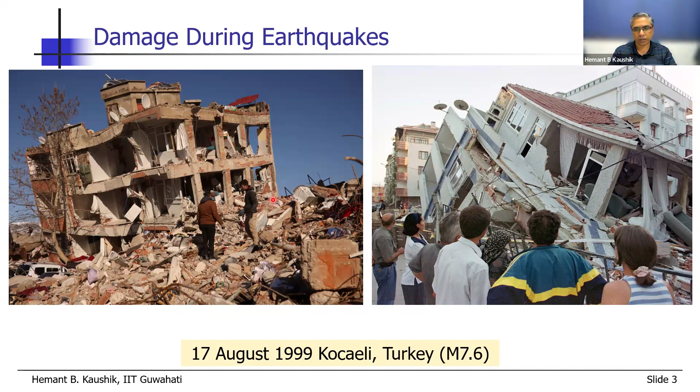So when a building collapses, an investigation happens where different people come together. They try to assess the damage and the reasons why it collapsed. Most of the time, there's not a single reason such huge structures collapse—there are multiple combinations of reasons. I'm not sure what the exact reason was for this failure, but you can see how the entire building got separated. You can see the reinforcement bars, shear walls, and columns completely separated from the foundation.

Then our own Bhuj earthquake of 2001. This was an eye-opener for India, because until that time very few major earthquakes had occurred in urban areas. But this earthquake, which occurred quite far from Ahmedabad, resulted in a large number of buildings in Ahmedabad collapsing. Most of these buildings which collapsed were residential apartment buildings with open ground story.

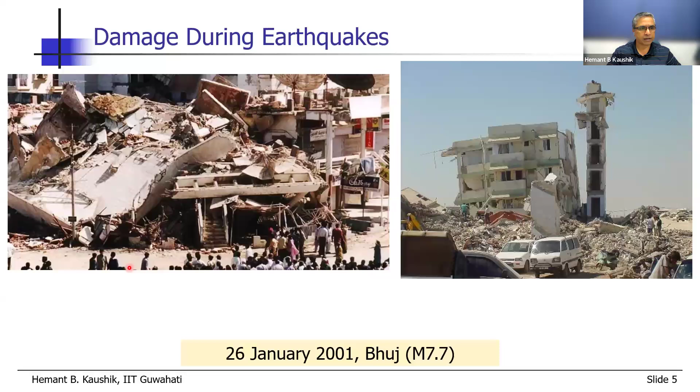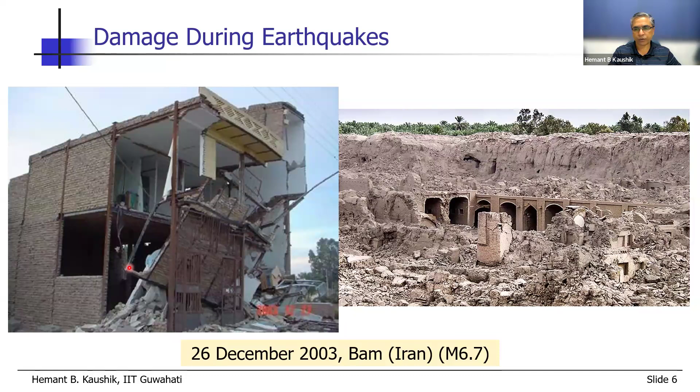Then I'll move to a different type of building here. These are not reinforced concrete buildings—the collapse of entire cities, towns, and villages happened in Iran in 2003. These are photographs of the town called Bam in Iran. The earthquake was 6.7 magnitude, big, but not as big as the 7.7 or 9 we've just seen. But you can see the damage. These are masonry walls, unreinforced masonry (URM) buildings, which collapsed.

Then again, reinforced concrete structures which were damaged unexpectedly. This is the 2004 Sumatra earthquake in Indonesia, a huge earthquake, 9.3 magnitude. This photograph shows a building in Port Blair. This building is also in Port Blair—a small, two-story building, and you can see what happened to it. There's nothing above this, just a porch. So very small structures, not expected to behave like this.

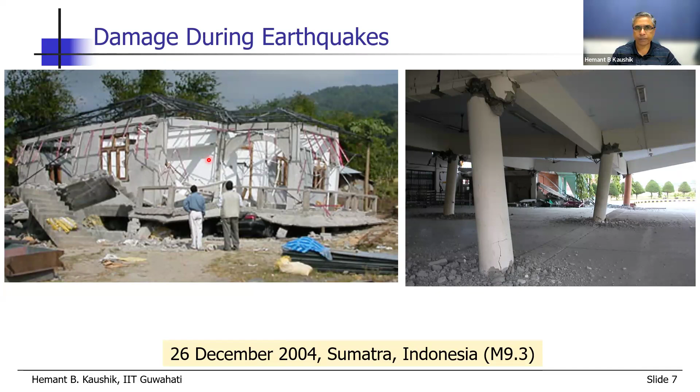This happened during an earthquake that occurred almost 1100 kilometers away. The epicenter of this December 26, 2004 earthquake was about 1100 kilometers from here—that means something happened in New Delhi and damage occurred as far away as Hyderabad. That's what we're talking about; generally this isn't seen. So what resulted in such unexpected behavior? These are the questions we'll try to address today.

Again, the 2005 Kashmir earthquake—you can see a very different combination of buildings that suffered huge damage. On the left side, this figure shows complete destruction of unreinforced masonry buildings, old buildings, and you can see the type of informal construction here, the type of rubble used in construction. Any type of rubble, any construction technology that may not be suitable for this highly earthquake-prone region was used here.

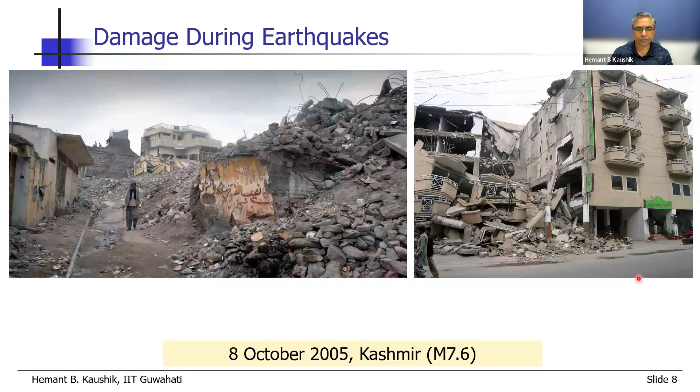Similarly, in the same earthquake, in urban areas, we found huge damage to reinforced concrete structures as well. Here we can see a 4-story building completely crashed, demolished, collapsed after the earthquake. Similar construction technology and typologies are seen in many cities in Pakistan, and similar damages were observed—these are reinforced concrete structures, again 4 or 5-story buildings. These are the buildings we have mostly been seeing suffering damage.

The 2008 China earthquake, again a very big earthquake, 8 magnitude, where we also found huge boulders sliding down the hills, damaging buildings as well as cars and other structures.

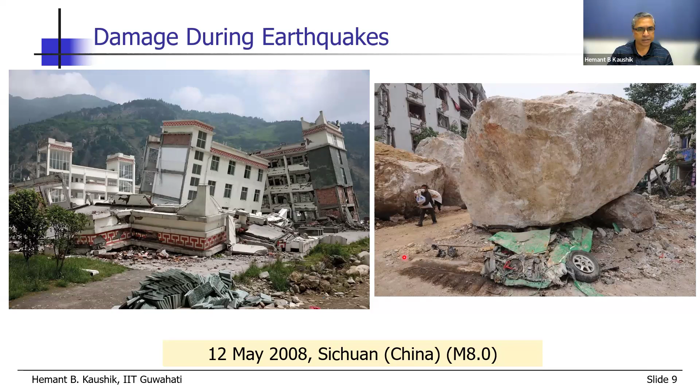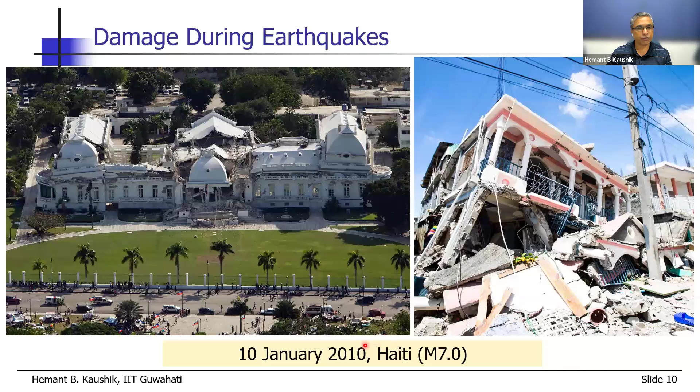2010 Haiti earthquake showed the combination of reinforced concrete buildings and the poor performance of unreinforced masonry buildings. This is the main palace of Haiti, where the president used to live, and you can see complete collapse of this unreinforced masonry palace. No doubt this type of construction was going to collapse in a 7 magnitude earthquake nearby. For those who don't know where Haiti is, look at Google Maps - you'll be surprised to see it's very near to the United States of America.

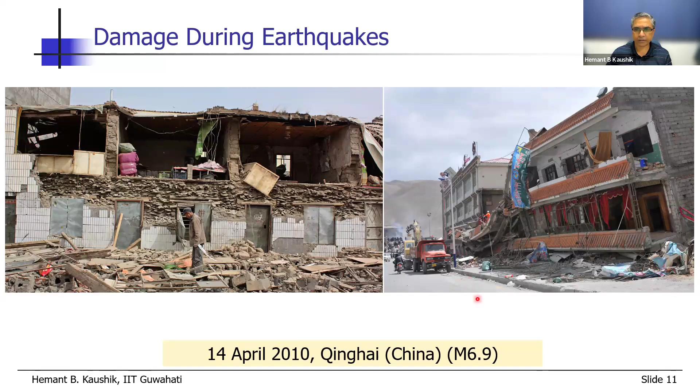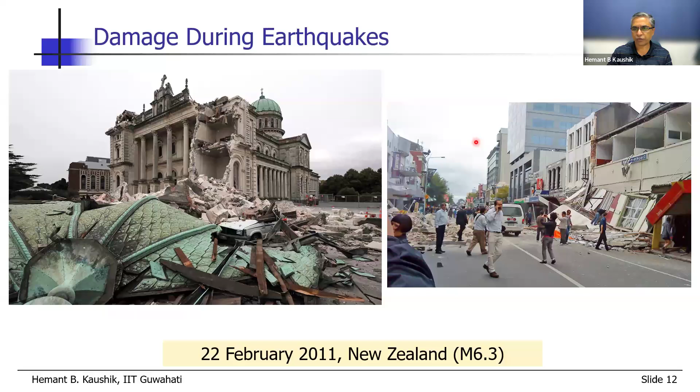Even in developed countries like New Zealand, a small country that spends huge amounts maintaining structures, construction, and design codes, the 2011 earthquake, which was not very large but occurred very near these structures, caused damage. This unreinforced masonry church building partially collapsed, along with some reinforced concrete structures. So not only in developing or underdeveloped countries, but also in developed countries, we see similar types of problems.

In Japan, an earthquake-prone country, the 2011 earthquake, magnitude 9.0, was particularly known for the damage it inflicted on various cities. Here, not only the shaking but also the tsunami waves resulted in huge damages. Most of these buildings were damaged due to tsunami, but some standing buildings show cracks and damage from the direct effect of earthquake shaking.

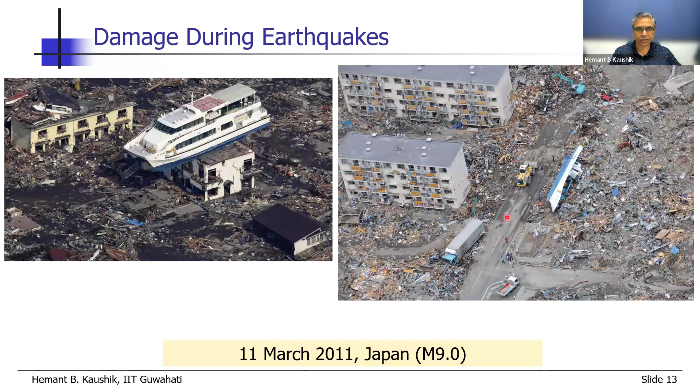2011 Sikkim earthquake, magnitude 6.9, one of the biggest earthquakes this region has experienced in recent times. We found large numbers of reinforced concrete buildings constructed on slopes suffered huge damages. This was actually a 5-story building, and you can see how cascading effects resulted in complete failure, with reinforcement bars visible. It's very obvious why these buildings failed, which we'll discuss later. A similar building looks like 2 stories from this road, but was actually 5 stories viewed from behind - that's how buildings on slopes are constructed. Most of these buildings suffered damage during this earthquake.

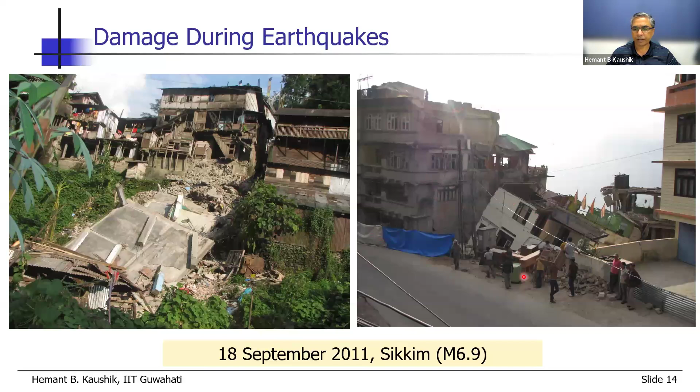Then the Turkey earthquake, 7.2 magnitude in 2011. Large numbers of reinforced concrete buildings again failed. When these buildings fail, the heavy roof collapses onto the floor below, and that entire story collapses onto the next, and so on. It becomes very difficult to get away from these buildings if there isn't enough warning. Tilting, when buildings are constructed on slopes, has been a common feature among all these earthquakes.

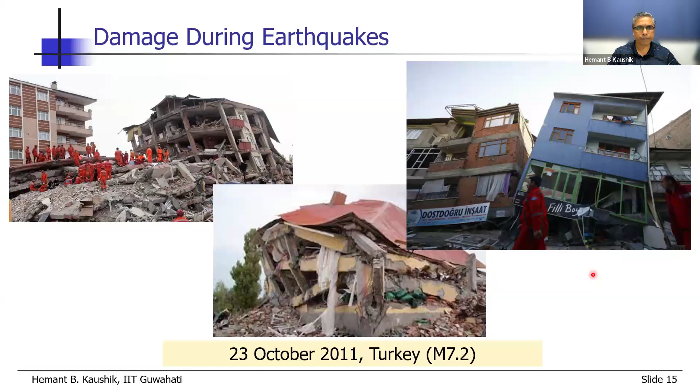2015 Nepal earthquake - you can see reinforced concrete buildings as well as unreinforced masonry buildings. During this earthquake, very old and famous temples in Nepal suffered unrepairable damage. You can see how old these buildings were - some are part of the temple complex, with huge thickness of walls and slabs. But unless the perpendicular walls are connected properly, we are going to see such kinds of failures.

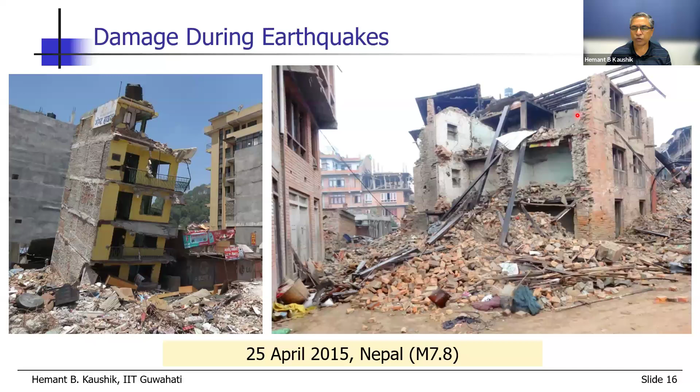2016 Imphal earthquake, another big earthquake, 6.7 magnitude in this region, Imphal, resulted in such failure of reinforced concrete members. This is a very famous women's market in Imphal, Ima Keithel. There are 4 such markets, and out of the 4, 2 or 3 suffered some damages, 2 suffered huge damages. All the columns in this market complex suffered such kind of damage.

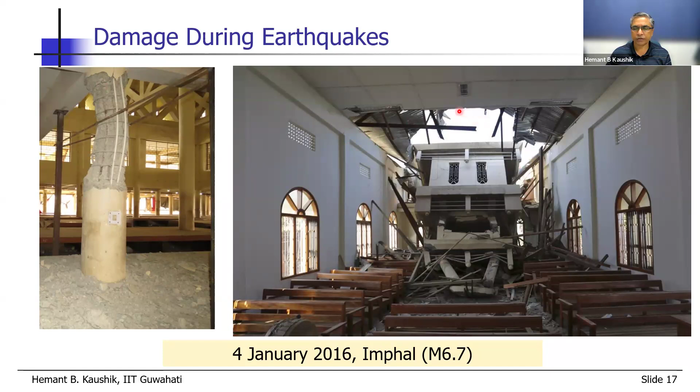Later on, concrete jacketing was done in these columns. This is a church in Imphal, and you can see how a part of the structure has collapsed and penetrated through the roof.

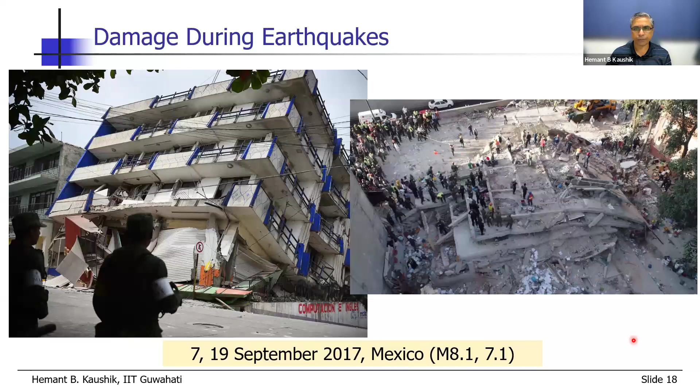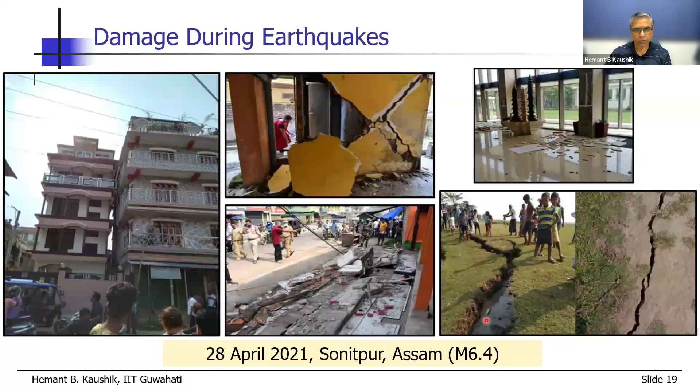So now I think you can see that the places are now being repeated. There were earthquakes in Haiti, there were earthquakes in India, there were earthquakes in Turkey, Iran, all these places, Nepal. These are now being repeated. But the major point here is, though the earthquakes are repeatedly occurring in these regions, the important point is damages are also repeatedly occurring in the regions. We might not have learned any lesson. That's why similar types of damages are occurring again.

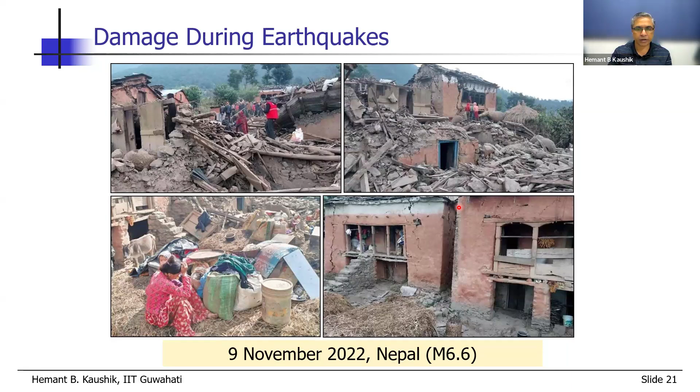This 2022 earthquake was a smaller one compared to the previous one, and you can see how unreinforced masonry buildings have suffered damages.

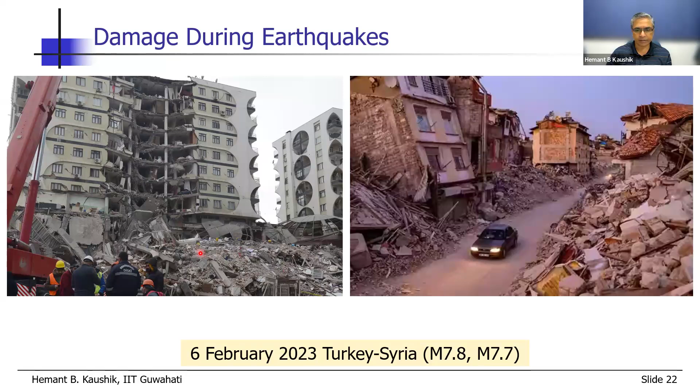Now, looking at these damages - and these are the unreinforced masonry structures - what we realized is that the design was very poor, the detailing was very poor, the connection between different elements was poor, and of course with some luck involved here. Basically the amalgamation of poor engineering, poor material, and a big earthquake nearby resulted in such failure.

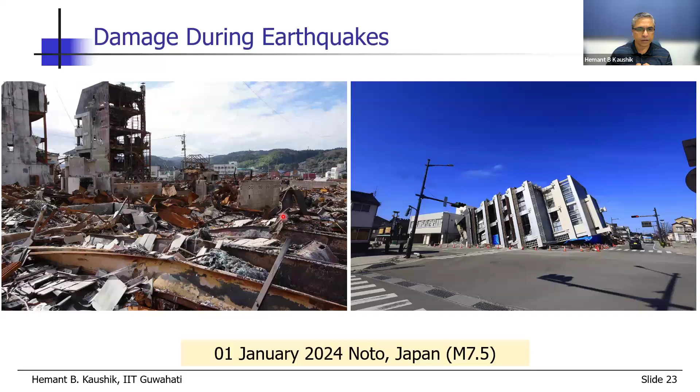2024 Japan earthquake. Again, you can see how liquefaction and foundation failure resulted in such huge collapse of big structures, big buildings. These are again reinforced concrete structures as well as steel structures collapsing.

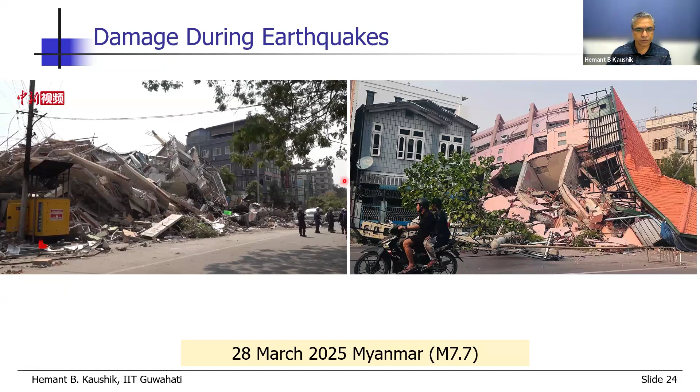Then the recent 2025 Myanmar earthquake, 7.7, and this is the earthquake in which we found a building in Thailand collapsing because of this earthquake in Myanmar. That was really surprising, how a building in Thailand could get that kind of damage. But then the plate tectonics in this region is such that these waves can transfer to long distances. Again, reinforced concrete buildings that collapsed.

So what we have seen is that RC buildings have collapsed. They have suffered huge damages during the past earthquakes in all these countries - developing, underdeveloped, all these countries. Then the second type of building that have suffered huge damages are the unreinforced masonry buildings. These types of buildings, which are vernacular or the traditional building typologies, have not suffered much damage during these earthquakes.

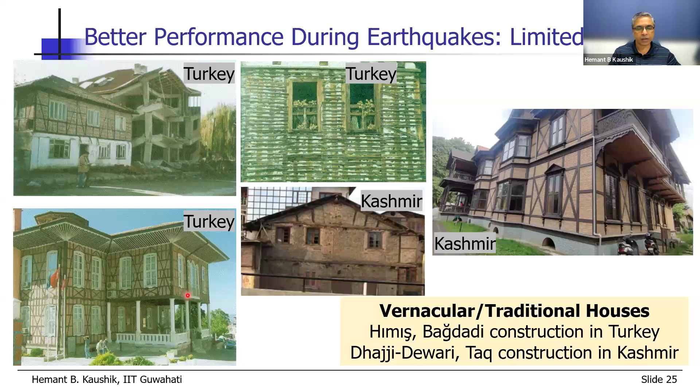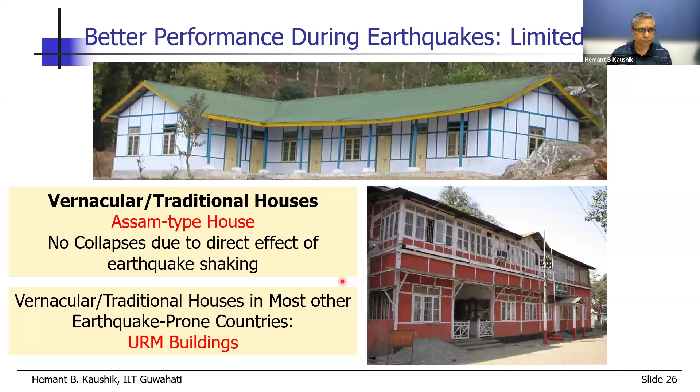So what we have seen is that these vernacular housing systems or traditionally built houses have not suffered significant damage during these earthquakes. But the new construction technologies, the reinforced concrete, have suffered huge damage. Now, what is the reason? That's what we are going to discuss next.

What we have seen is that the most common building material constructed in India is masonry. So masonry is the most common construction material in India. It is used in more than 80% of the building stock in India, so more than 80% of the building stock is unreinforced masonry.

Now why is it so? Because bricks are economical, they are very easily available in various shapes, sizes, and textures. So almost every building has masonry.

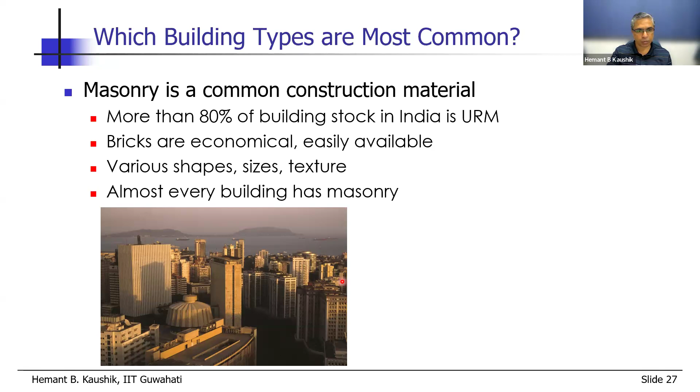You can think of this building in New Bombay, Navi Mumbai, or this building in Gangtok, the capital city of Sikkim. One is a very organized construction, the other is haphazard growth. But all these buildings have masonry in some form or the other.

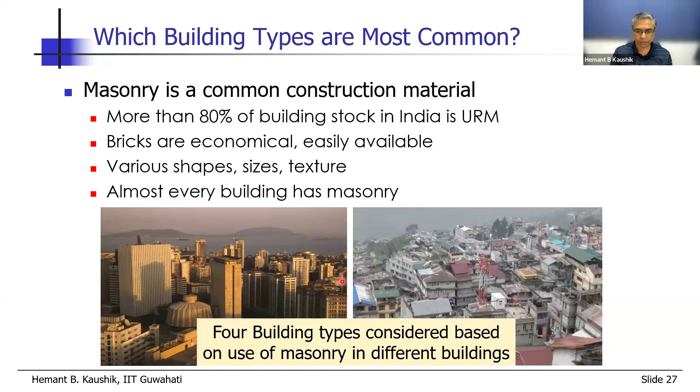Now, use of masonry in these buildings governs how they are going to behave during an earthquake. Based on the usage of masonry in different buildings, we have considered 4 building types, and we try to determine the reasons for their poor or good performance during earthquakes. Now, how did we find out these 4 building typologies?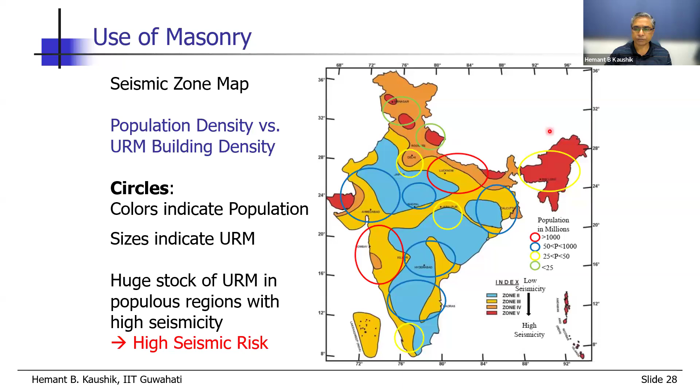Based on this, we came up with an idea to test 4 different types of buildings that are most popularly constructed in India. The first of these is masonry infilled RC frame buildings, because we have seen that these buildings suffer huge damage during earthquakes.

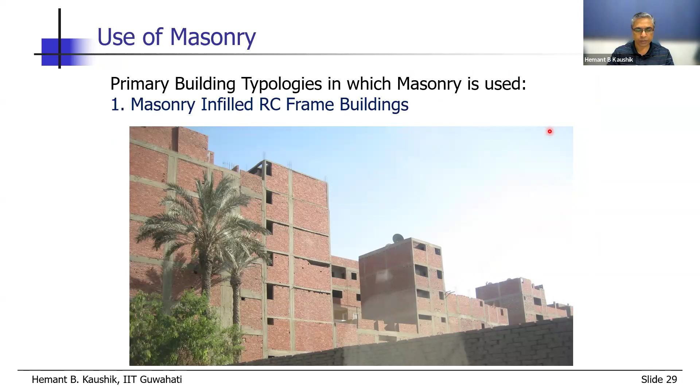Then the next is unreinforced masonry buildings, because we have again seen that these are the buildings which suffer after almost every earthquake. We find that URM buildings suffer the most. So we have considered these.

Now this building visible in this photograph, I'm sure some of you might recognize it. This is a 120 year old unreinforced masonry building, constructed in Port Blair during British time as a cellular jail. This is what they used to call Kalapani.

They used to send our freedom fighters here. This was originally a very vast structure. You can see here the central tower, the watchtower, and there were 7 such wings which emanated from this central watchtower. Today, I think 3 or 4 such wings are still standing, and they attract a large number of tourists. Out of 7, 3 have collapsed completely during the last 120 years, but 3 or 4 are still standing.

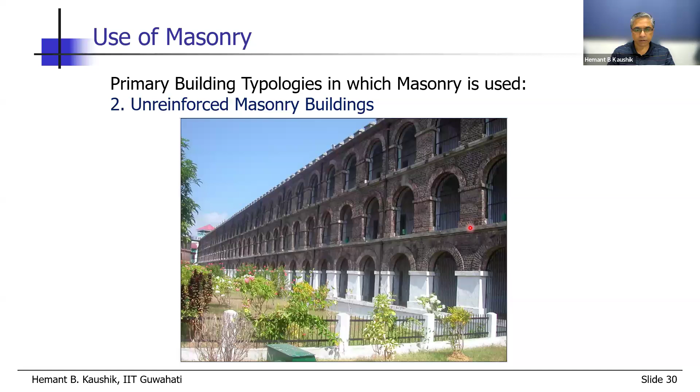So this is a pure, completely unreinforced masonry structure. All these arches, everything, is unreinforced masonry here. But not all buildings have performed so well during past earthquakes, as we have already seen.

So the third type of construction that is there in many countries now is confined masonry buildings. These come somewhere in between reinforced concrete structures and unreinforced masonry structures. A combination of these two gives us a confined masonry building, and I'll discuss more about it later. What is the difference?

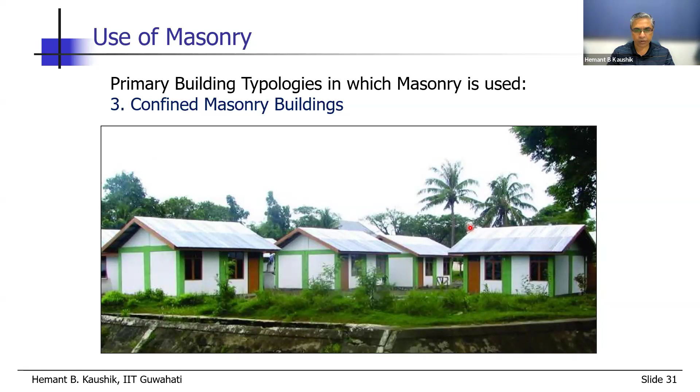Then we have selected the fourth building typology, which is a vernacular, traditional building in this part of the country, in Guwahati, in Assam, in the northeast. In fact, this type of building is very common along the Himalayan belt. So the Assam type houses, also known as Ikra houses, are considered the fourth building type for this study.

Here, the masonry infill walls are used below sill level, up to this level. Below this, these are all unreinforced masonry walls. But above that, there are no masonry walls. We'll discuss more about it when we start discussing the tests.

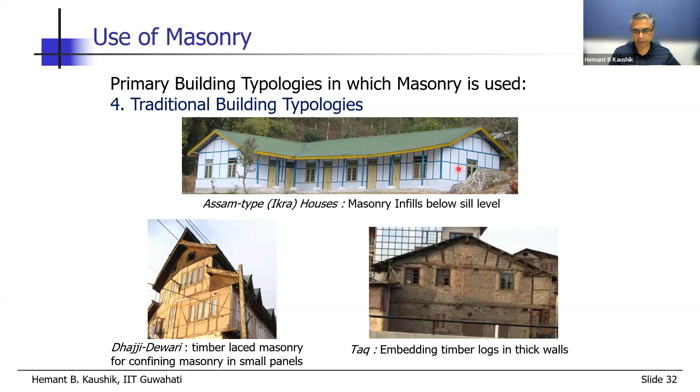So then what we did, this is the first building type, reinforced concrete frame buildings. We tested a large number of such frames without infill, with infill, different types of infills, different strength of infill, different materials - somewhere fly ash bricks, somewhere clay bricks - and all these, whatever possible at that time, we tested. We also considered different areas of openings in these walls. If I remember correctly, we tested more than 25, 30 such frames under earthquake-like lateral displacement applied here at the slab level.

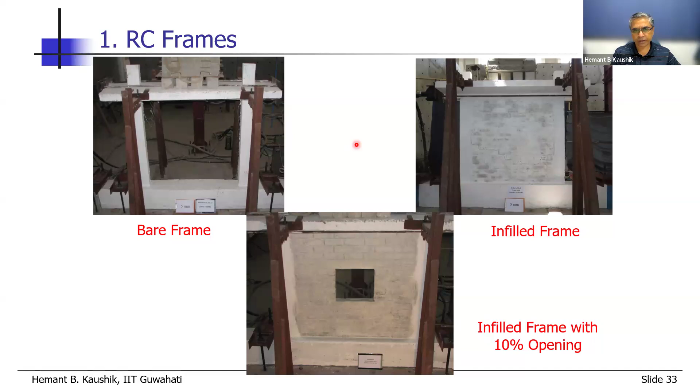And we got very good insights on their behavior. So today I'm going to compare, out of those 25, 30 tests, I'm just showing you results for these 3 tests.

This is how the tests were conducted. The specimen, the frame specimen, was connected to the strong floor rigidly, so it did not move at the base. The displacement loading was applied using the servo-controlled hydraulic actuator at the slab level. The response was recorded with the help of LVDTs, strain gauges, and laser displacement sensors connected at different places.

So you can see the reinforcement detailing, the locations of the strain gauges wherever we have used - all that is visible here.

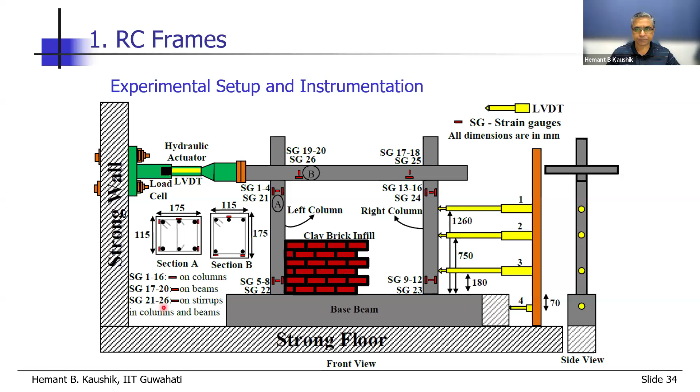What I'm going to show you is the video of one of these tests. The test was carried out in a slow cyclic manner because we wanted to record the damage to different members during this test. Though the test took about 2.5 to 3 hours to complete, I will show you the test in a very fast forward manner - maybe about 30, 40 seconds, we'll see the entire test.

So please try to see how the damage starts in these infill walls, and how that damage is then transferred to these reinforced concrete columns and to the beams. See if there is any damage to this beam below, the foundation below. This is the infill frame with class 1 clay bricks. You can see the load applied from the top, and the displacement applied using this actuator is also visible here.

So you can see we have already applied this displacement and the cracks have started forming in the masonry wall, which are then transferred to the columns. You can see how cracks in the infill walls are transferred to the columns - the column starts developing cracks because of these infill walls. Depending on the location in the column, you can very easily see this is the shear type of failure occurring - flexural cracks, and again shear cracks on top.

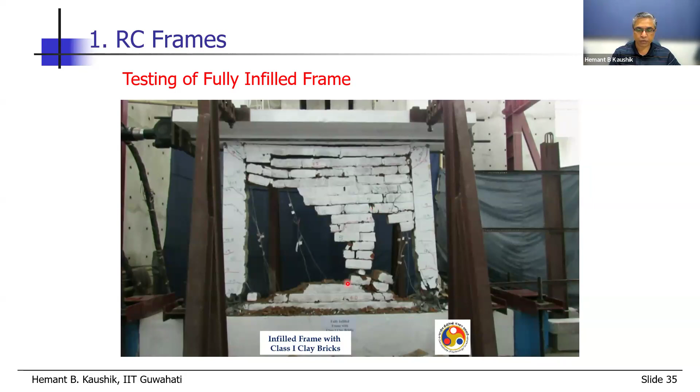Now you can see how the column has completely failed at this displacement level, and this is the final failure for this frame. Both the bottom and the top of both columns have suffered huge damage - there's a failure, and the wall has completely gone away. But the interesting point here is the wall resulted in transferring the damage from wall to column. All these cracks started in the walls and then transferred to the columns. So when we provide walls in a frame structure, we have to be careful, because the walls can also damage the columns.

This is the lateral load displacement curves for the 3 frames. Here, there were no infill walls used, a bare frame. You can see the overall strength of this bare frame was about 35 kilonewton, and the drift level up to which it went was about 6%.

As soon as we inserted the infill walls, there was a tremendous increase in the lateral stiffness. Several times, you can see the slope of this line versus this line. Not only that, the strength also increased to about 105 kilonewton. So about an increase of 3 times in strength and 8 to 10 times in stiffness resulted because of the presence of these infill walls. And the drift capacity was about 5%, slightly more than 5%.

The third case where we had a window opening: you can see stiffness is large, slightly less than the fully infilled case, but still large. The strength is also much more than the bare frame, but less than the fully infilled frame. So now the strength is about 70 to 75 kilonewton. But the ultimate drift again remains almost similar, 5 to 6%, which is huge.

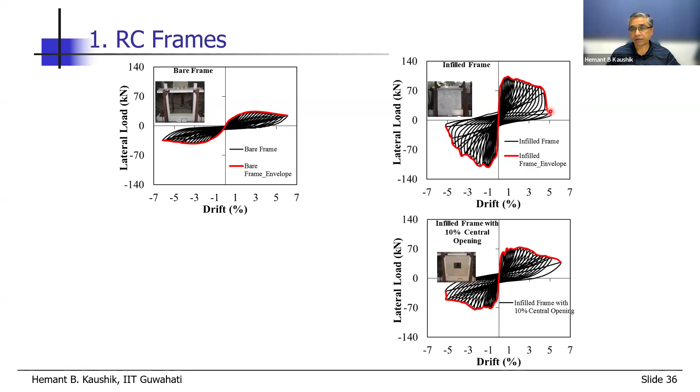If you remember IS 1893, it says the design drift should be about 0.4% only. So we are talking about 0.4%, that will be somewhere here. This is satisfying the criteria, and 0.4% is somewhere here, which is of course satisfying, but the ultimate drift that it has resulted in is about 5 to 6%. Huge drift.

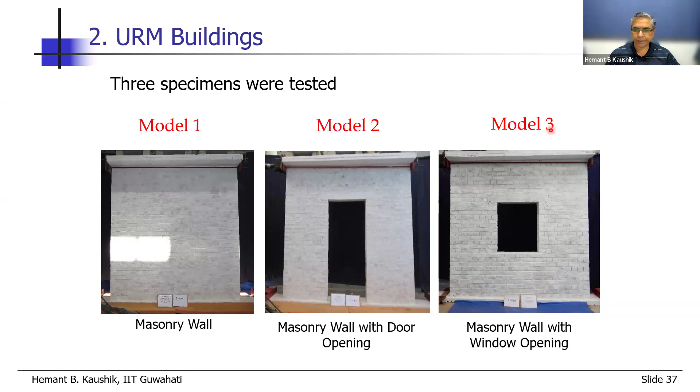Then the second type of building that we considered was unreinforced masonry. Here also we tested a large number of walls and buildings, and I'm showing you some of these results, which are very interesting. I'll compare these 3 walls first: without any opening, with door opening, and with window opening. For the comparison, I'm showing you video of one test.

Again, the testing took place in a slow cyclic manner. Displacements were applied using these actuators here, and there was response recording using the laser displacement sensors. The test will be shown in fast forward manner.

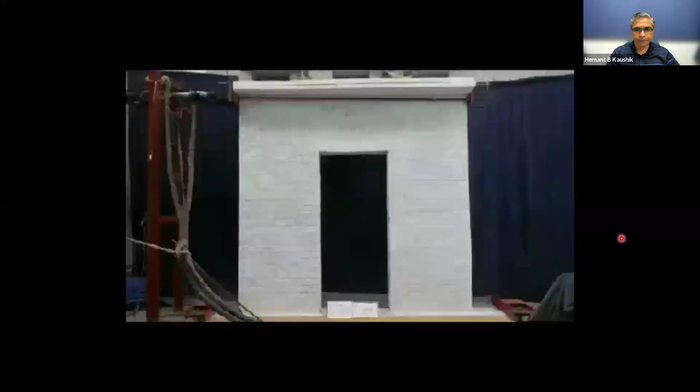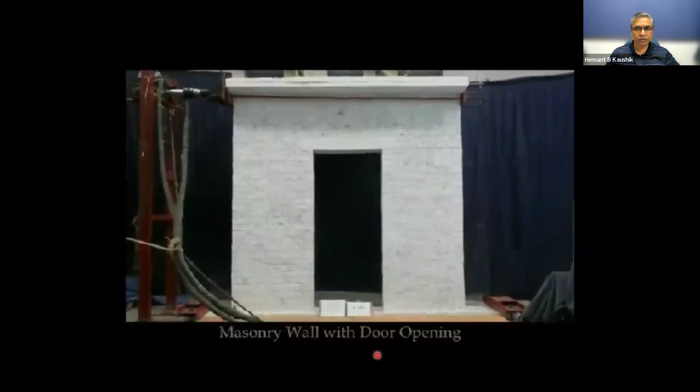The displacement applied at the top is visible here. This is, I think, about 2 to 2.5 mm displacement applied. Since it is very less, you may not be able to see the movement of this wall, because in the previous frame, the reinforced concrete frame, it went up to about 100 mm, so we were able to see that. Here we have just reached about 5 mm displacement, and you can see with the movement of the people, suddenly it failed.

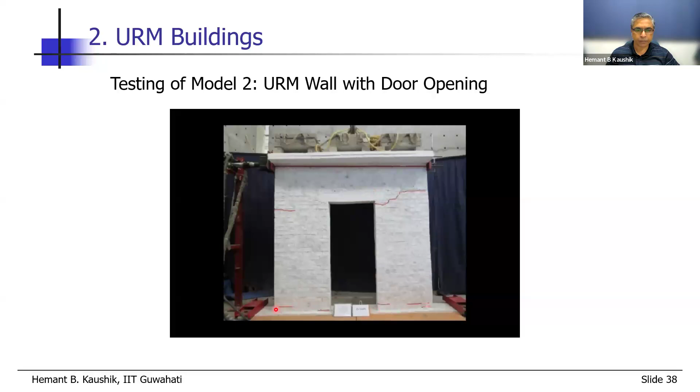At about 6 to 7 mm, suddenly, without giving any warning, this unreinforced masonry wall failed, and we had to stop the test on an emergency, because otherwise this would completely fall. What we observed was not a surprise, because the cracks started forming near the door opening due to the area of huge stress concentration here. The cracks formed at the base because of large moment demand on both sides, and from one end. This is how the unreinforced masonry wall behaved compared to the RC frame.

Now look at the load. For the full wall, without door opening, the lateral load was about 25 kilonewton, but the drift was only about 9 mm. This 9 mm is about 0.3% drift, which is very less compared to the RC frame, and it does not even satisfy the IS 1893 criteria.

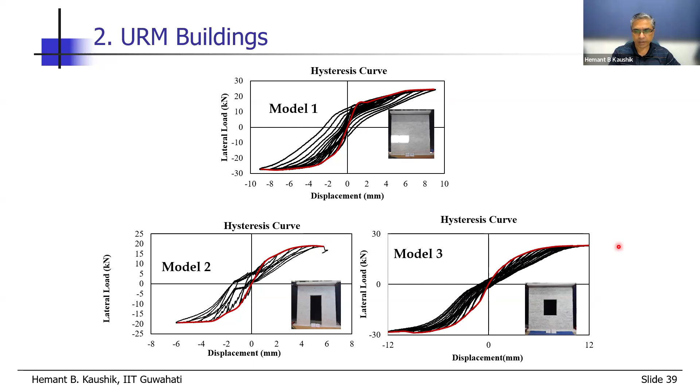None of these walls did. For the wall with door opening, it failed at about 6 mm, suddenly, without giving much warning. The wall with window opening resulted in 12 mm displacement at failure, but the strength was almost similar, 20 to 25 kilonewton. This is a major difference between a URM structure, unreinforced masonry building, and a reinforced concrete frame building. The drift capacity is very, very limited in case of unreinforced masonry buildings.

Now here you will find that because of the box action created by combining the four walls together, joining them together, the building does not fail immediately when the cracks are formed, unlike the single walls.

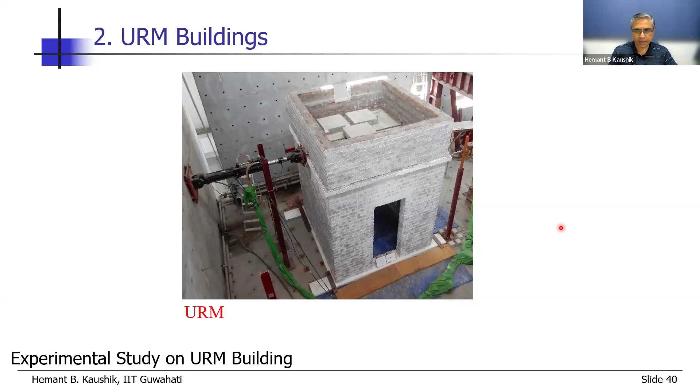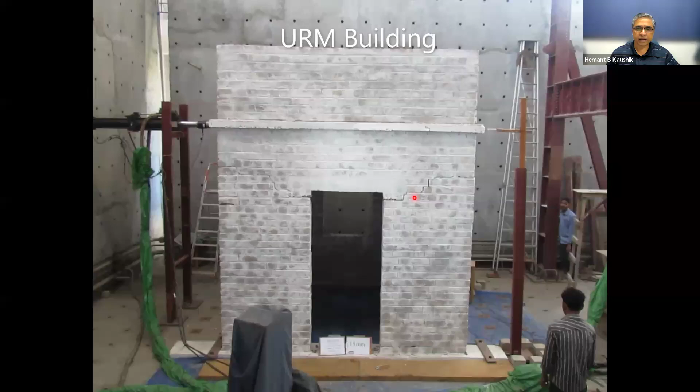So this is the test video. Again, I'll show you it in a fast forward manner. So immediately you see this crack formed. As soon as the crack started, not only this crack here at the top, but also a crack here at the bottom.

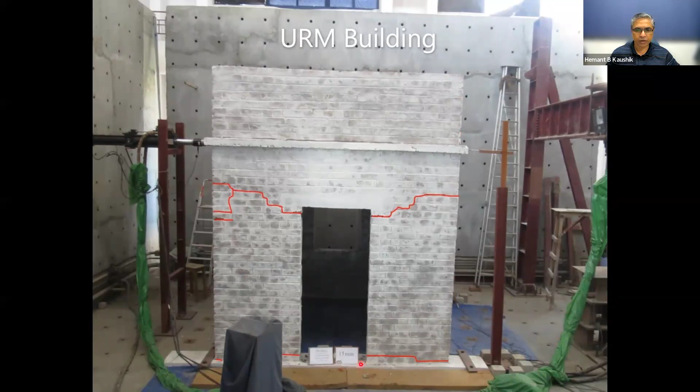This is very similar to the failure observed in a single wall, with the difference that it did not collapse completely, but this part of the structure was completely separated from the overall building, and it was rocking. So this type of failure is called rocking failure. At about 15mm, 20mm, we found that this building failed.

Again, a brittle type of failure, but because of the box action, total complete collapse did not occur.

Now, the third type of building that we considered is the confined masonry building. What is the difference between this, the confined masonry building, and the reinforced concrete frame building, is very interesting. First, there's a difference in the construction process. In confined masonry, we first construct the walls and then we construct the reinforced elements.

These reinforced concrete elements are called the tie columns and the tie beams, which are different than the columns and the beams. The difference is the size. Size of these tie columns and tie beams is very small compared to the normal columns and beams that we see in reinforced concrete buildings.

Also, the reinforcement detailing is very minimal here. In case of tie columns, there are only generally 4 bars provided, and the shear reinforcement that is provided is very less—maybe 6mm or 8mm bars at 300mm center to center. That's what we are talking about.

But in case of reinforced concrete buildings, these frame buildings—the frame, basically the columns and the beams—are designed for all the possible loads. They are constructed first, then the walls are constructed. So that is a major difference here.

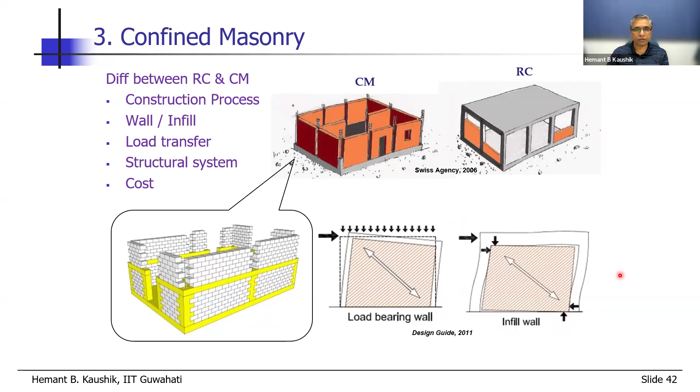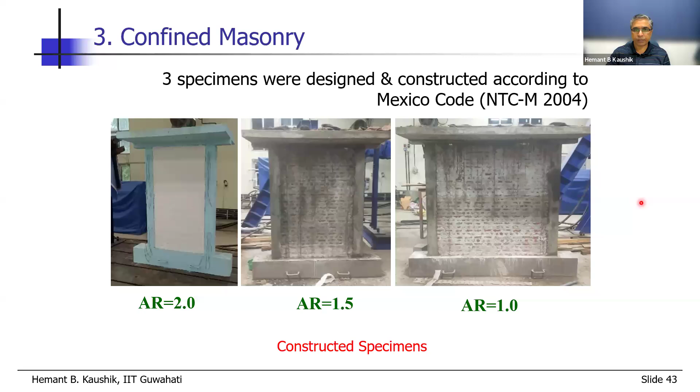These frames, these walls, were tested with a similar setup. The lateral loads were applied in the form of displacement at the top slab, and this was constructed on this beam, which was rigidly fixed to the bottom rigid floor.

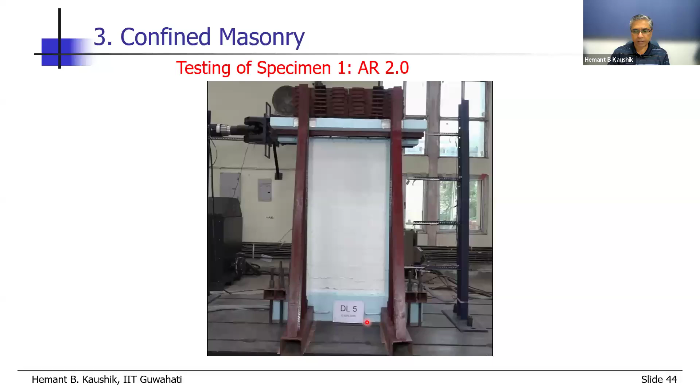So let me show you this video again, in a fast forward manner, and try to see how damage in this masonry wall occurs and how it resulted in damage to the tie columns. You can see that the lateral displacement is applied here and how this crack starts appearing in the walls.

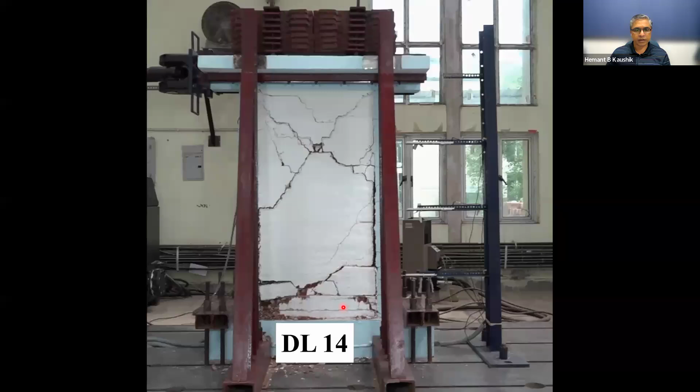These X cracks are because of the cyclic action of the load. You can see the interaction crack between the tie column and the wall, the cracks transferring to the tie columns, all very easily visible here. And then finally, the failure of these walls. This is how the confined masonry wall behaved.

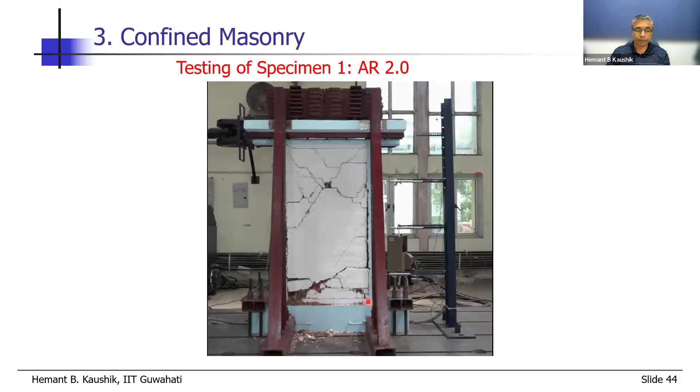Now, it resembles the behavior of reinforced concrete frame structures. Well, but there's a difference in these two. But if we make confined masonry structures properly, they can behave just like a reinforced concrete frame building.

Now finally, the fourth type of buildings that we considered - this is the vernacular Assam type housing. We tested all these frames and buildings and all these joints separately, the material, everything was done. Today I'm showing you these 4 frame results.

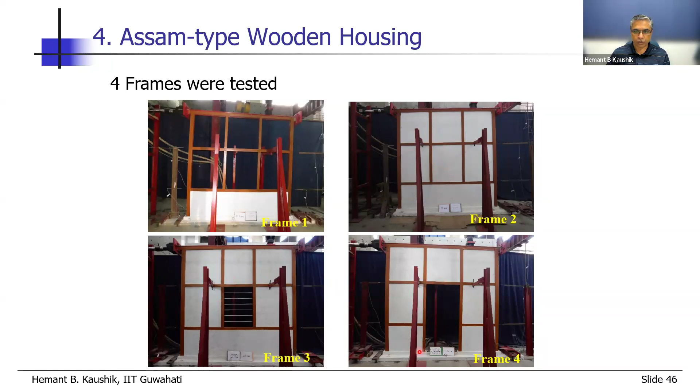So you can see two different sizes of these walls here, these are called Ikra walls. In olden days, instead of bamboo, people used river reed to construct these walls, but nowadays, since bamboo is very easily available, they use bamboo here. The third specimen had a window opening and the fourth specimen had a door opening. So these are the four specimens we tested.

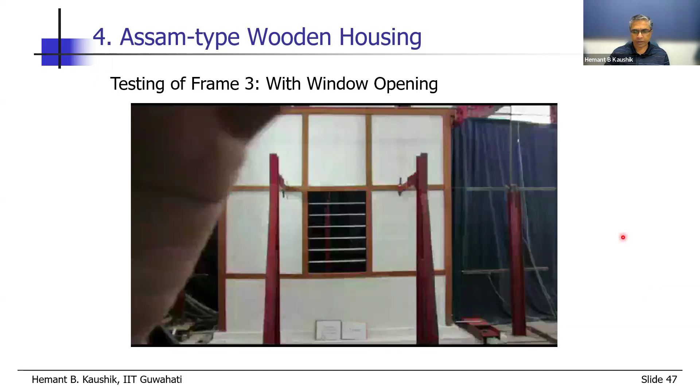Let me show you the video for this third specimen, which had a window opening. A similar test setup was used. Please concentrate on what happens to these connections, these connections made of wood, please have a look at them, and concentrate on how this single frame behaves under this action.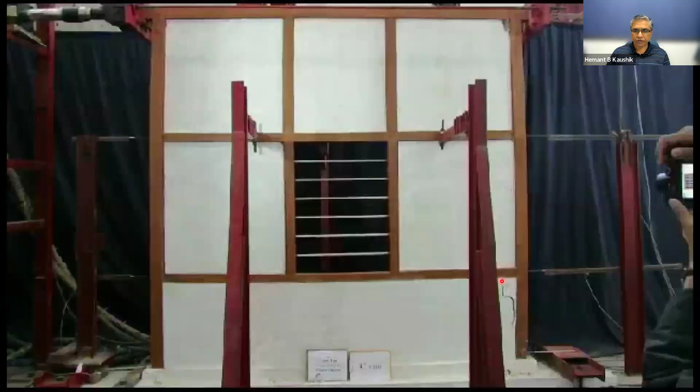So you can see we have already reached 20 mm, 22.5 mm displacement here. But there is not a single crack in the structure except for this crack in the masonry wall at the bottom. Now, the reason why masonry wall is provided is to prevent the ingress of moisture and stray animals into the house.

With about 40-45 mm displacement, I think at 140, you can see what is happening to this connection here. You can see the ekra wall here, the bamboo shoots are visible now. And see how this connection is actually breaking apart and then again joining.

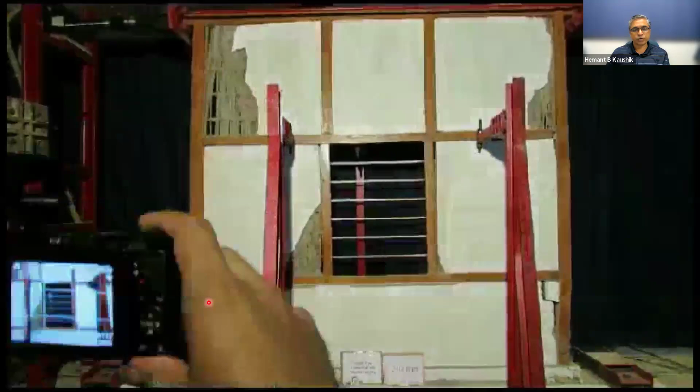Now we have reached a displacement of about 230, 215 mm. See what has happened to all these connections, breaking and then again connecting. What happened to this vertical connection between the frame structure, the wooden frame?

So that was very interesting. This frame, where you don't have the ekra wall, was very flexible. The initial stiffness was very less. The strength was also very less, only about 10 kilonewton.

When we add the ekra wall, you can see the tremendous increase in the initial stiffness as well as the strength. The strength reached almost 22, 23 kilonewton. The drift was, say, 8 to 9% again. Now, this 8 to 9% drift is almost double the drift of reinforced concrete frames and confined masonry frames. So it is huge, and even after that 8%, 9% drift, you can see that it does not fail.

We have seen how all these connections were broken, but then in the opposite direction of displacement, we found that it again regained and joined back. That is because of the very flexible connections provided here, between this member and the ekra wall. All these connections were very flexible, and you can see the vertical connectivity simply broke by several centimeters, and then it again came back.

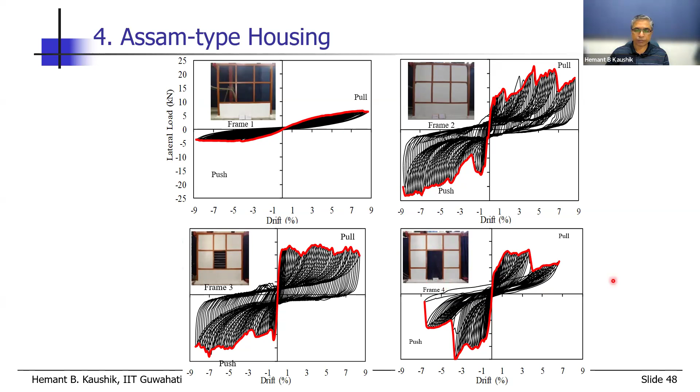So this is one vulnerability we observed in the historical construction methodology they used. These frames were not inserted into the foundation. So that is the recommendation we have given to the state, that there should be a foundation for the door frame as well.

Now, what we did, we combined all these walls together and constructed a room. This is a full-scale Assam type house room, 3 meter by 3 meter by 3 meter, and we tested this entire house on a shake table.

We wanted to see how this entire house behaved during real ground motions. What I'm showing you is the test result for the Taft ground motion applied at the base on the shake table, with peak ground acceleration of 1g, which is huge. This building was subjected to 112 ground motions, from very low values of peak ground acceleration to very large 1g values. There were 5 different ground motions from past earthquakes, as well as 1 simulated ground motion, and we varied the intensity.

In between, after every earthquake and before every earthquake, we also applied white noise to measure the natural frequency of the house. The natural frequency tells us if there is any change in the behavior of the house. If there is any damage, the natural frequency will reduce. So in order to check that, we applied white noise also.

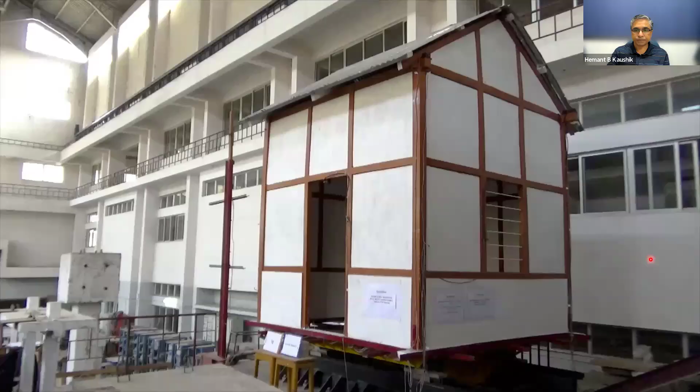This I'm showing you in real time, this is not fast forward. I hope you can see the relative motion between the base and the top. Because it's a very large ground motion, you can easily see that relative motion. These are the accelerometers placed at various locations in the house, and there were LVDTs and displacement sensors to record the displacement.

If you think this is a small earthquake, the student who did the test tried to stand here. During the test he couldn't stand because it was a big earthquake, he had to literally lie down. So the test is almost over, and I'm sure you might not have noticed a single crack on this house. It's a big earthquake, not a single crack. There's no doubt how these houses are behaving - perfect behavior, no damage at all.

But when we look closely, we found there was some loosening in the nails, some minor cracks at the interface of the timber and the masonry. All that happened, but these were not visible from a distance. Because of these minor cracks, we found that the natural frequency reduced by about 15 to 20%. But that is not a real reduction, because if there were reinforced concrete frame structures or unreinforced masonry structures, the reduction would be multiple times.

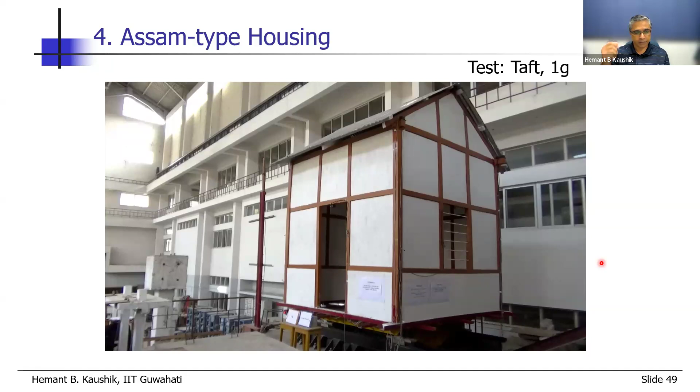So this is the way this entire building behaved during real earthquakes. But the student said that unless he fails this building, his PhD will not be complete. He was literally worrying about his PhD, saying he has to fail this building. So then what we did, we shifted the entire house after 112 ground motions were applied on it.

We shifted from the shake table to this previous arrangement in which we can apply large lateral displacements. In the case of the shake table, we could apply only about 10 mm or 15 mm relative displacement between the bottom and the top, and that resulted in no cracks.

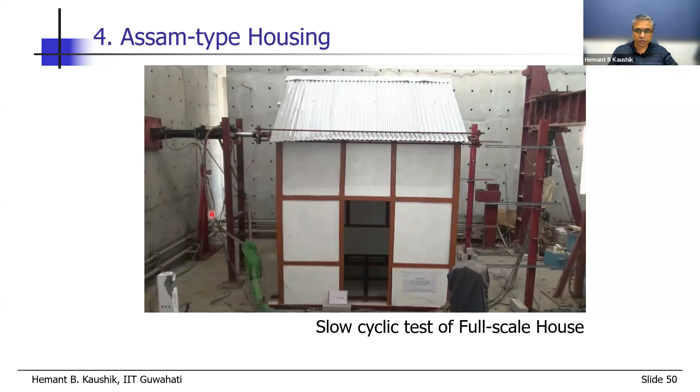Here we can apply plus minus 250 mm displacement at the top, so let's see what happens to this house. This test is shown in fast forward, otherwise it would take 2 to 3 hours. We reached 20 mm relative displacement between the bottom and the top, and nothing happened, not even a crack, not even an interface crack.

At 40 mm, 45 mm, you can see there is a gap here now, and this connection has broken at 70 mm, 75 mm. But otherwise there's nothing. At about 90 mm, there's a connection breakage here. At about 105 mm, there's some minor damage at the frame. Now we have reached 120 mm.

Slowly you can see that the connections which are broken are again coming back, like we have seen in the case of the single frames. See, this is how the different connections are separated and then they come back again.

180 mm, now we are reaching 200 mm, and you can see the ekra walling, the bamboo ekra walls here, and the connection. 225, 230 mm, there is no sign of collapse of this house. 240 mm, plus minus 240 mm.

So we pushed this structure to plus 240 mm, then brought it to 0, and then pulled it by another 240 mm. That's 480 mm displacement, both plus and minus, that we gave. This house did not collapse.

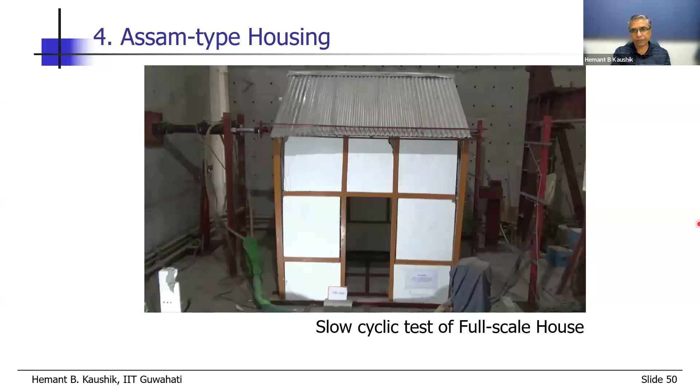Then what? The PhD has to be completed. So we changed the setup, and we said we will not apply the displacement in a cyclic manner, but simply push the structure by 500 mm until it fails. So no cyclic, simply pushing. That resulted in failure of the specimen, but I'm not showing that video again because it's simple—whatever is visible here, it simply increased.

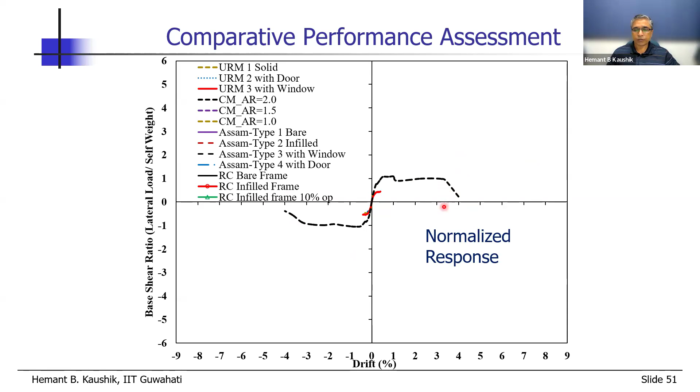Next we tested a confined masonry building. You can see tremendous improvement in strength, but we are not so concerned about strength as the very large increase in lateral drift, reaching 4%. This is where we have to think about how and why these buildings performed well compared to unreinforced masonry—obviously because they can sustain a huge amount of drift. That is the reason these buildings performed well.

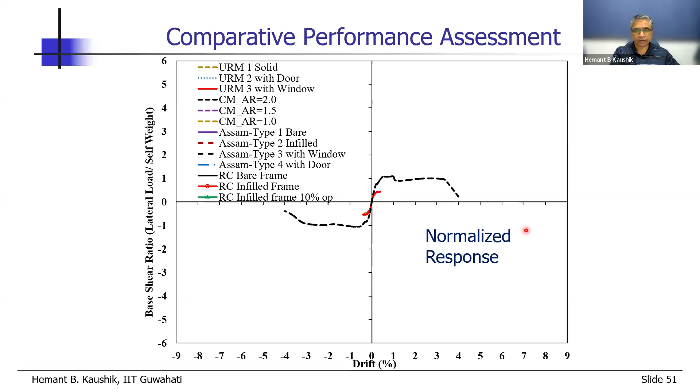The second type of confined masonry with aspect ratio 1.5 shows similar strength and further increased drift. The third frame, with aspect ratio 1.0, had a shear failure so the drift is less, but it still reaches about 2%, and the strength did not reduce—in fact, strength is highest among the three.

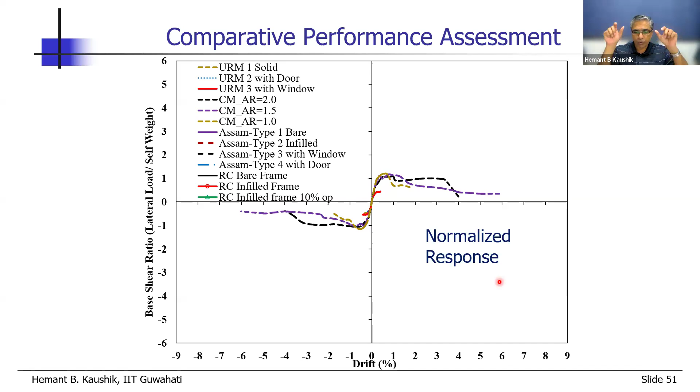So now compare the difference between confined masonry and unreinforced masonry. Simply by providing these small elements, which are tie columns and tie beams, we can improve the performance tremendously. It has been observed during previous earthquakes that these confined masonry buildings have not suffered much damage.

Assam type house - you can see that these buildings can go infinitely as far as the drift is concerned. The strength is not much here, but the drift is reaching almost 8-9%, the highest. Compared to all other structural systems, the stiffness is very low here. These are very, very flexible structures.

The second type where we provided the infill, ekra wall, and the third type where there were window opening and door opening. You see that stark difference, a remarkable difference in the behavior of these three building typologies: unreinforced masonry, confined masonry, and Assam type housing.

Now comes the reinforced concrete frame buildings. This is the bare frame. There's no comparison - the bare frame is behaving much, much better than any of these frames. Large strength, high deformability, very good drift.

When I insert the infill wall, you see the behavior here. There's no comparison between these buildings and the unreinforced masonry buildings. Look at the increase in the strength, the stiffness, with remarkably high lateral drift.

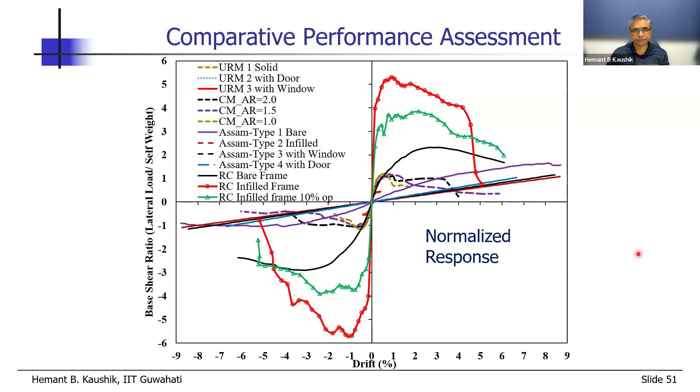Confined masonry buildings and Assam type house - you see, Assam type house will not fail. Confined masonry buildings show much better performance, even with respect to these, because the RC elements are not designed here - the masonry is designed. So with this, I really found no surprises.

We have to improve the construction practice. We have to use good materials and follow design codes. With these three points, I'm sure the best buildings we just saw in the previous figure, the reinforced concrete buildings, will remain best after earthquakes. Otherwise, there will be catastrophic failure of these buildings.

Now, in our semi-urban areas, in villages, I understand that there are limited structural engineers. There are no guidelines, the codes are not there. So in such cases, why not construct the confined masonry building instead of reinforced concrete buildings, which cannot be designed or constructed without the help of engineers? But then confined masonry buildings can be constructed.

And if we do that, the performance will be much better, the seismic risk will come down. If I ask you, out of these four typologies, which one would you adopt? The answer will be very difficult. Given a chance, everybody would like to adopt the best building, which is reinforced concrete.

But then adopting is something else. Designing them properly is something else. We have to design them, we have to construct them, use good materials. Only then will they behave perfectly.

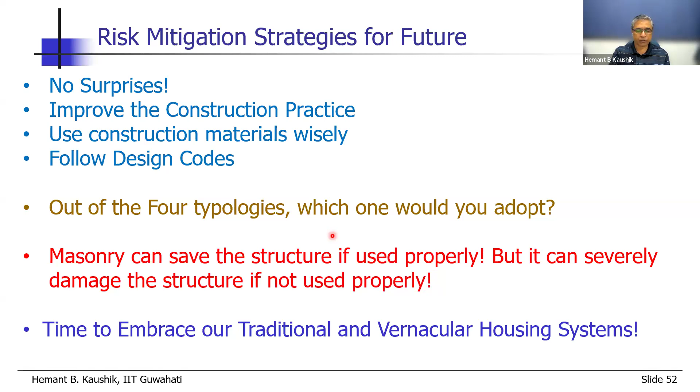And obviously, it is time to embrace our traditional and vernacular housing systems, because in villages or in semi-urban areas, or even in urban areas if you have enough space, there's no reason to construct a reinforced concrete building. The traditional Assam type housing has performed really well during all these past earthquakes.